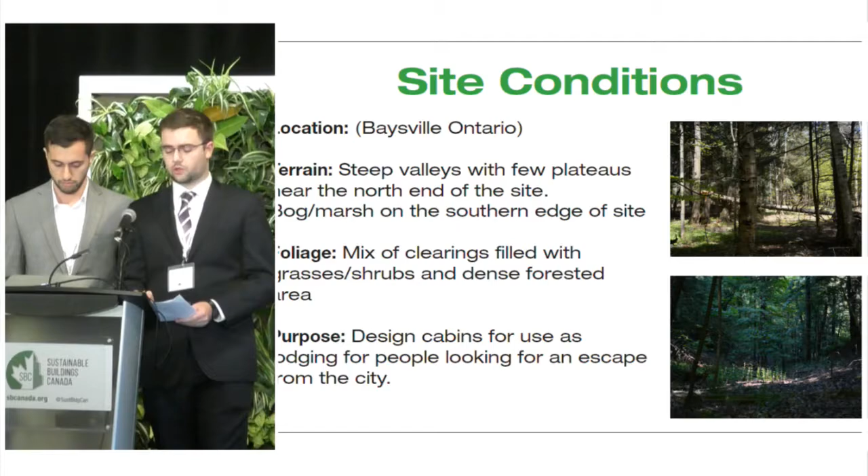So a bit of a description about the project. The location itself is in the Muskoka region, where the site is covered with a mix of shrubs and dense forest. And the purpose of this project is to design cabins to be used as lodging for adventure seekers and people looking to escape from the city. The client requested that we design off-grid cabins which have a minimal impact on site and do not use fossil fuels. The cabins are sized for 2 to 4 people who would stay on the site for up to three days at a time.

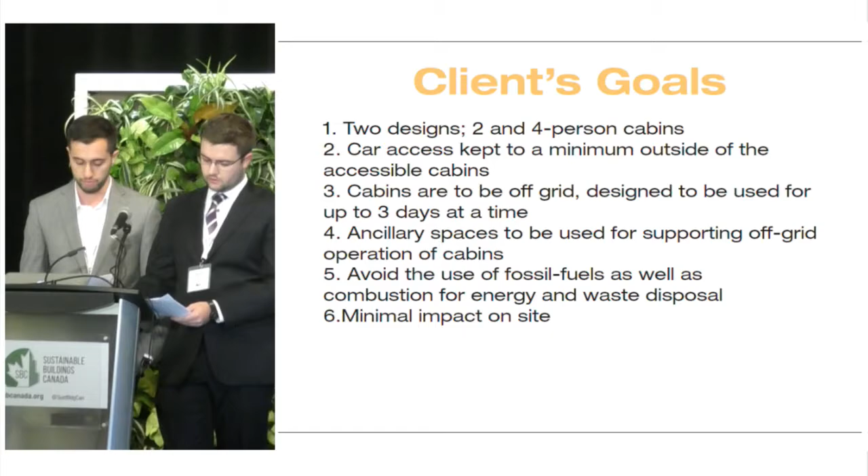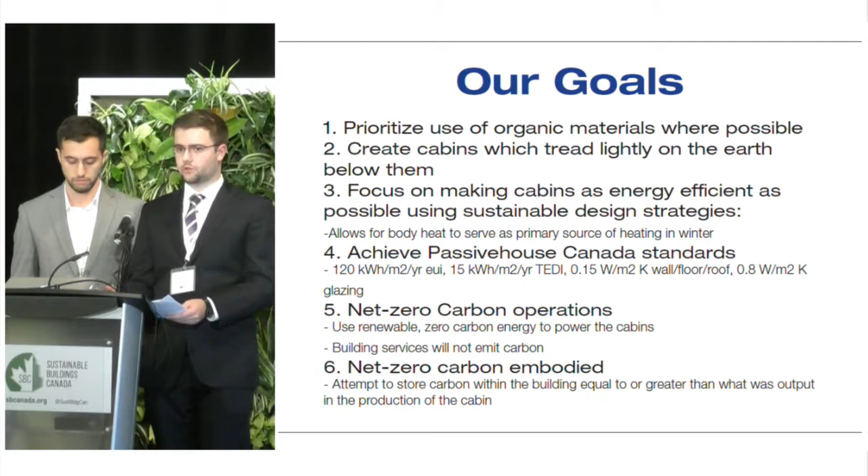So our primary goals for the project were to create energy-efficient cabins which were both light on the site and also focused on the use of natural materials. Other goals include conforming to the Passive House Canada standards, as well as attempting to achieve net zero building operations and embodied carbon. Our idea for the cabins was to create a wooden cradle in which the cabin would sit. The cradle itself would allow the prefabricated cabin to adapt to various site conditions as well as blend in with the surrounding environment.

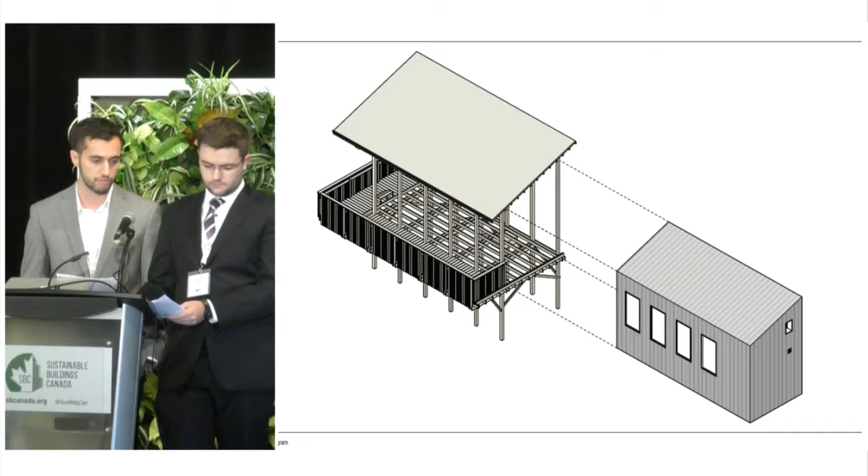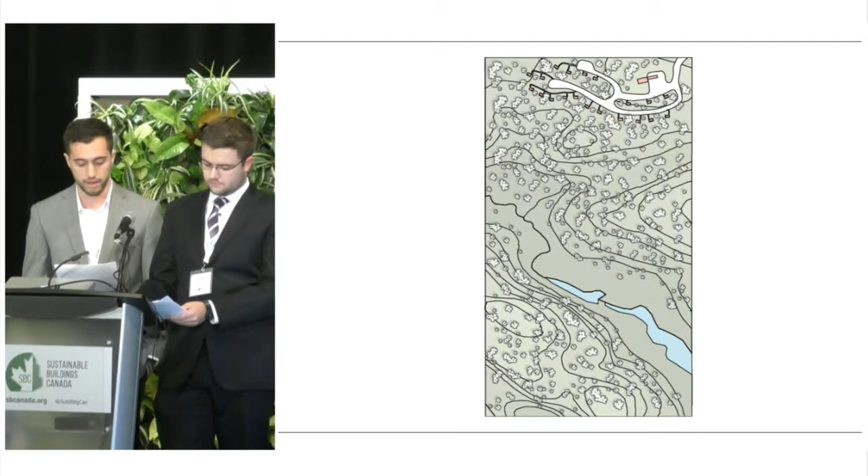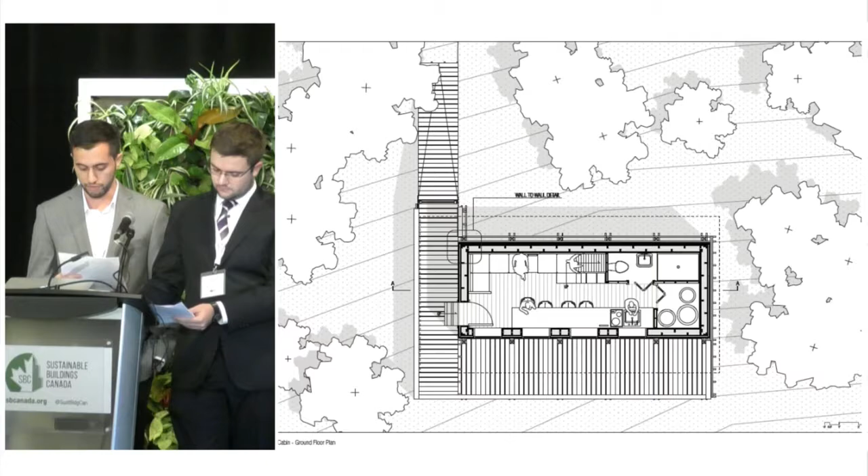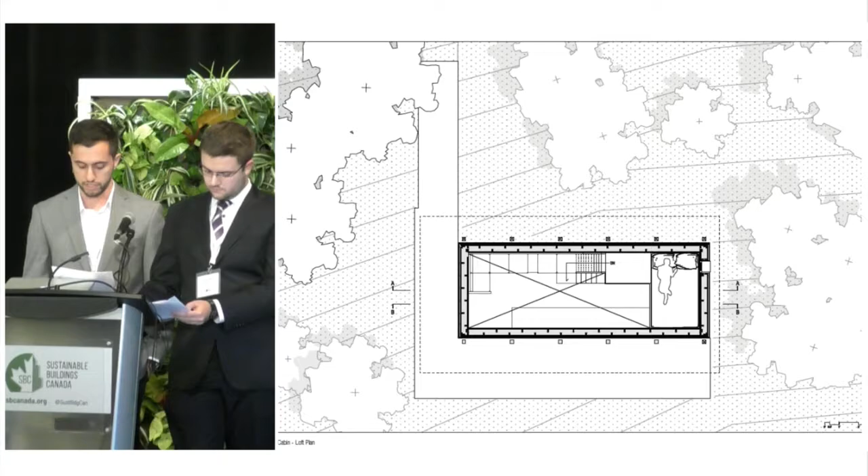After analyzing the site, it was clear that the most ideal location for the cabin was the northeast corner. This had the most flat topography, existing road access, and the largest clearing of trees for parking and solar power generation. For this project, we designed 2 sizes of cabins dependent on the number of occupants. The layout for the 2-person and 4-person cabins are quite similar, with the large south-facing windows, the custom furniture, and a staircase leading to the loft space above. The major difference between the two is that the 4-person cabin has an additional bay to accommodate a larger washroom and seating area. The loft space allows for storage by the stair landing and a small east-facing operable window for passive cooling.

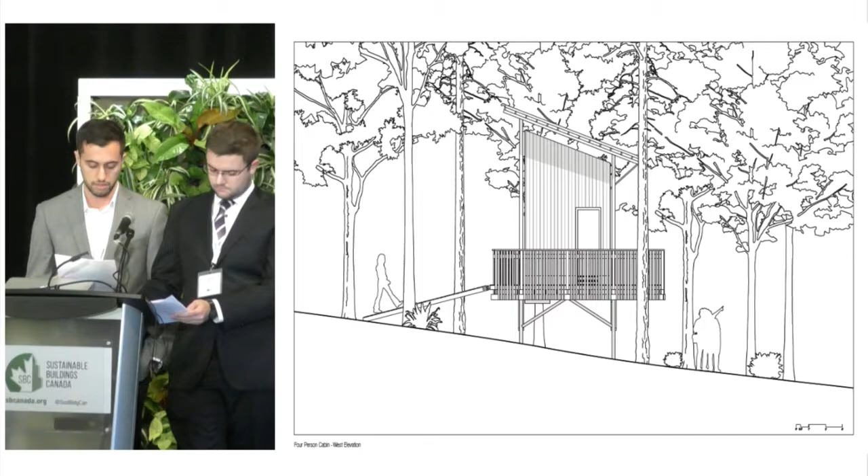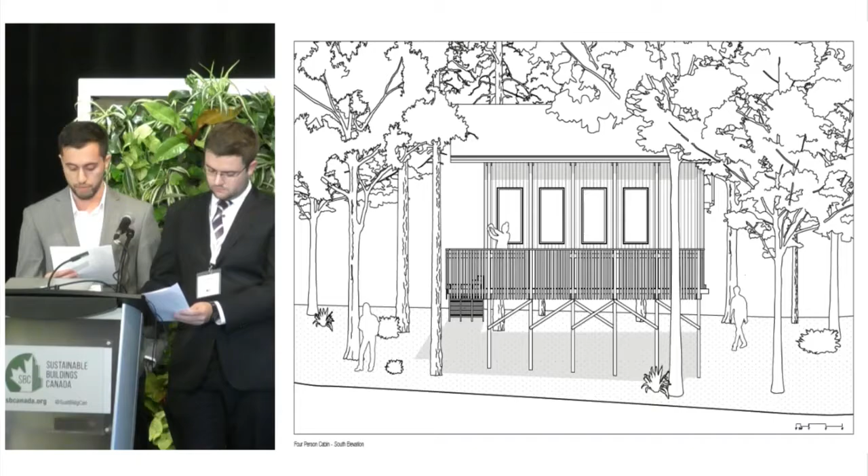The main approach to each cabin is from the north towards the ramp, which then adapts to topography and elevates the occupants amongst the trees. The wraparound porch extends south to provide an outdoor seating area for the occupants, and I feel the south elevation really captures our idea of camouflaging the cabins amongst the forest through the use of vertical orientation of major building elements like the exterior cladding, the railing pickets, and the structural timber columns. The roof also extends out at the optimal length for passive solar shading, as well as maximizing the orientation for the PV panels on its surface.

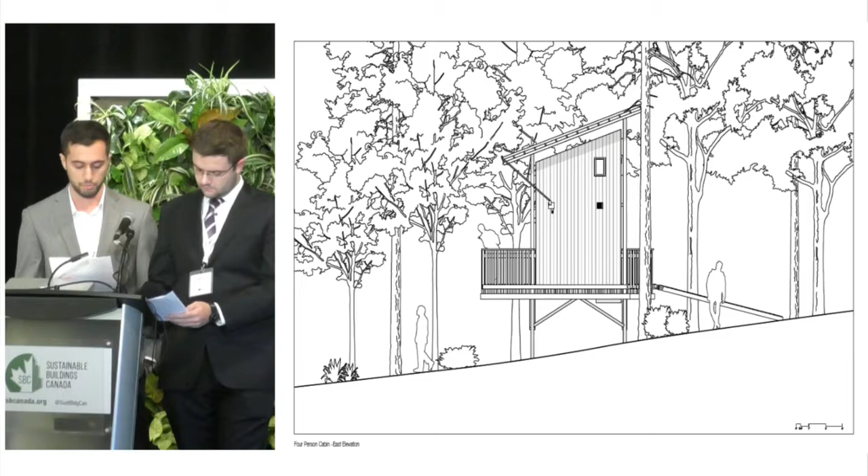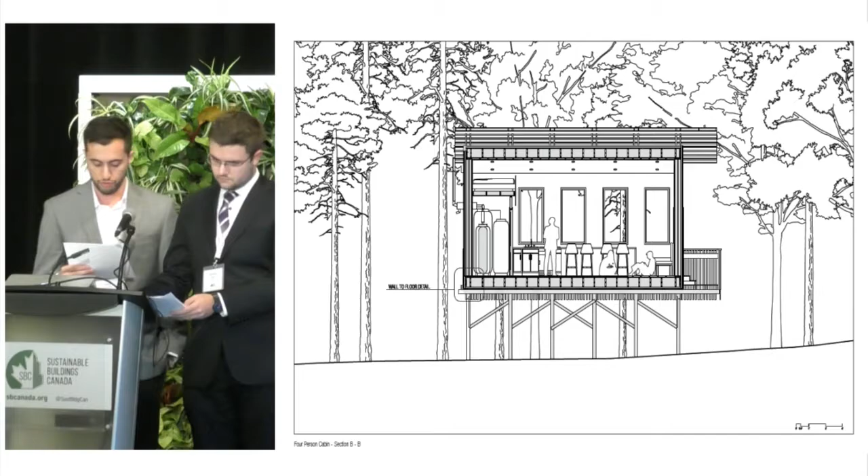To accommodate for the lack of storage in such a small space, the steps themselves become storage units for the kitchen. This allows the beautiful views of the forest to remain unobstructed and further immerse the occupants into the surrounding environment.

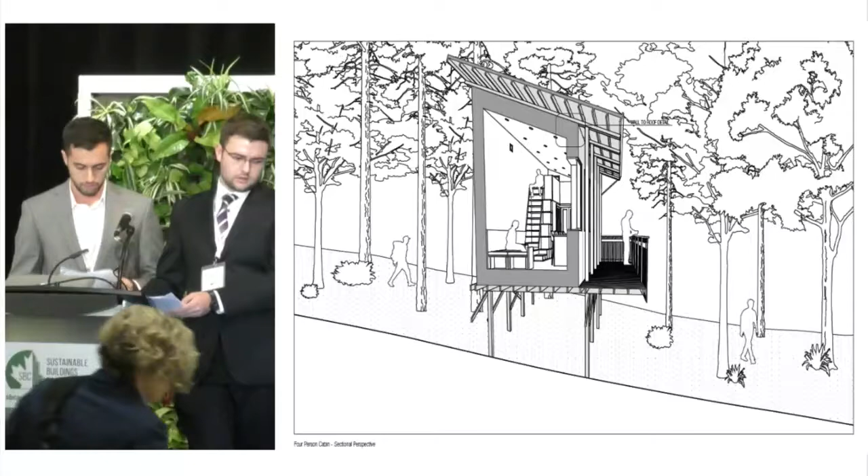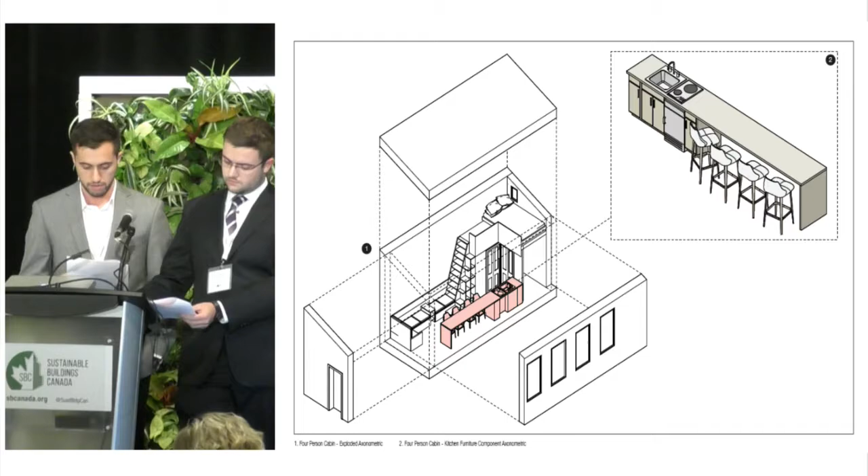For the interiors, we tried to optimize the aspect of prefabrication through the use of custom built-in furniture, such as the kitchen counter and the couch. The counter was designed to mitigate all vertical storage on the south facade and focus on connecting the occupant to their exterior location and environment.

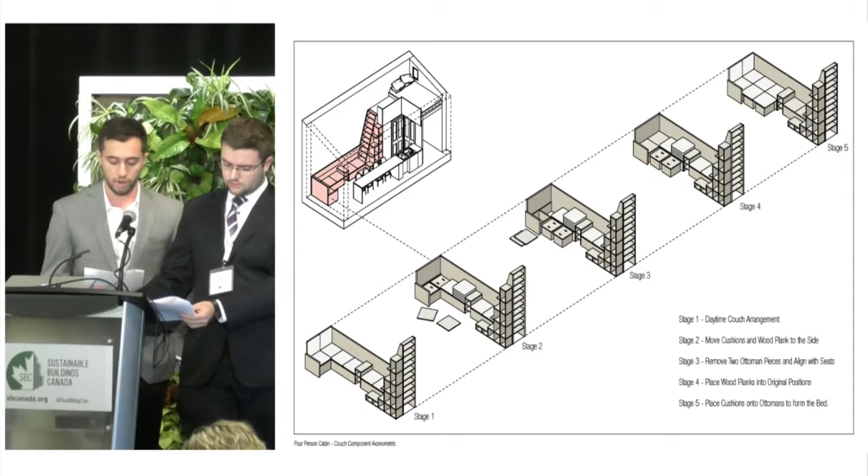This diagram showcases the built-in sofa that can be converted into a bed in order to accommodate 4 occupants. To further optimize the space, the couch and staircase are combined into a single element, thus creating a visual connection between the different levels in the space.

All right. So one of the largest challenges when designing this cabin were the details, and constructability was going to inherently be an issue due to the prefabricated nature of our building. So to address this, we focused heavily on constructability and ensuring that the cabin is both easy to build and airtight. The building's prefabricated components would be delivered in separate panels and assembled on site. Bolt connections located on the interior of the panels would be used to attach these elements while ensuring the highest degree of airtightness.

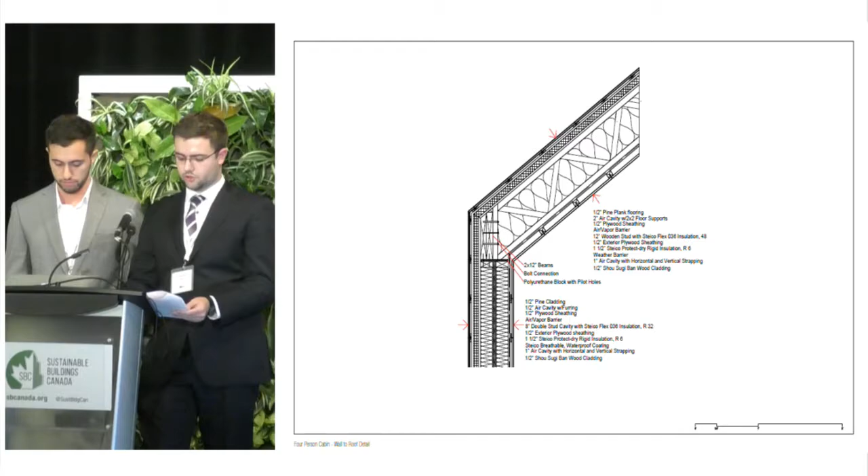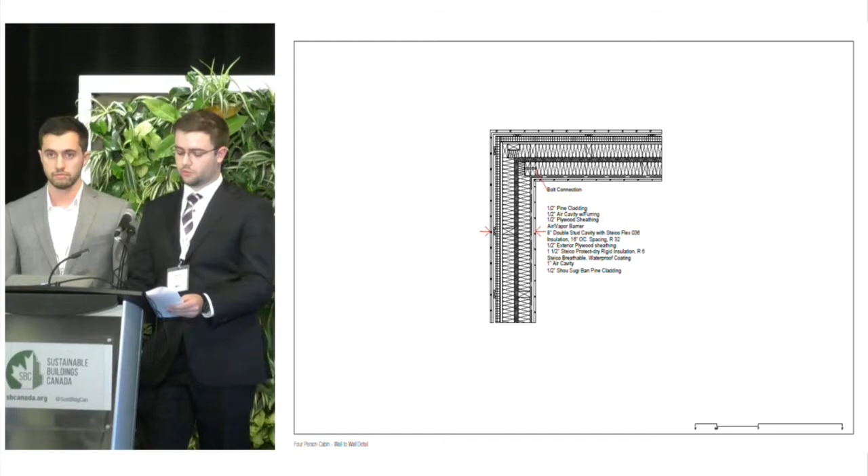So another focus of the design was to reduce thermal bridging to the smallest level possible. To accomplish this, the walls are made of a staggered double stud frame with wood fiber based insulation on both the exterior of the wall as well as the interior wall cavity.

So the floor and the roof structure are comprised of wooden trusses, which allow for higher insulative values than traditional joists. And the floor itself is raised 2 inches off of the top of the plywood, which allows for electrical outlets, wiring, and in the same case for the ceiling, the lighting to run through the building without penetrating the envelope. And another quick detail is the cabin itself sits atop rubber vibration isolation pads, which are generally found in HVAC equipment, which act as another thermal break.

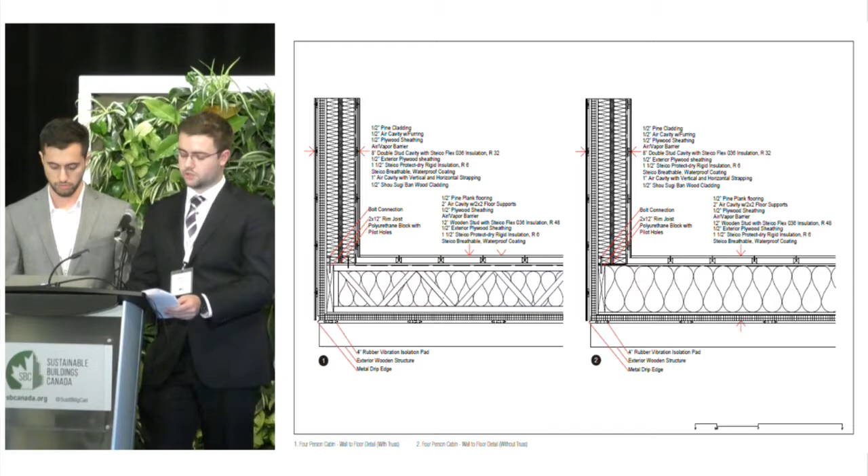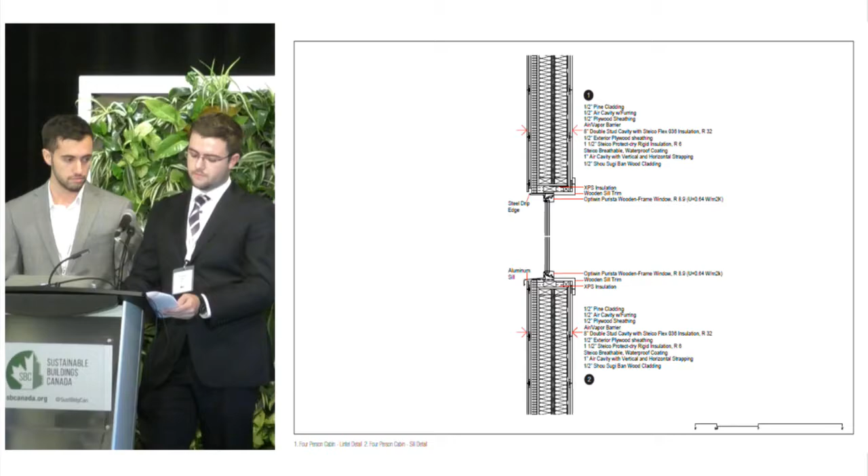As for the glazing, we opted for wood frame triple pane windows, and these windows coincide with our desire to pursue natural materials while also providing a very high insulative value. The mild summers in Muskoka allow for the cabin to be cooled strictly by cross ventilation, thus greatly reducing the cabin's energy demand. And the primary heat source during the winter months is actually the appliances and the occupants themselves.

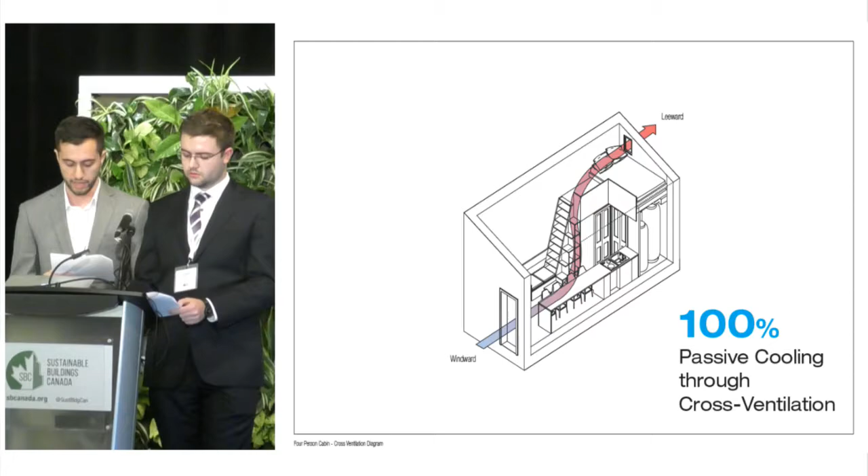The cradle roof creates a large surface from which rainwater can be collected for use in the building. The diagram on the right showcases how the rainwater ties into the overall gray water filtration system. The use of ultra-low flow fixtures and pint flush composting toilets allow for an extremely low projected daily water usage.

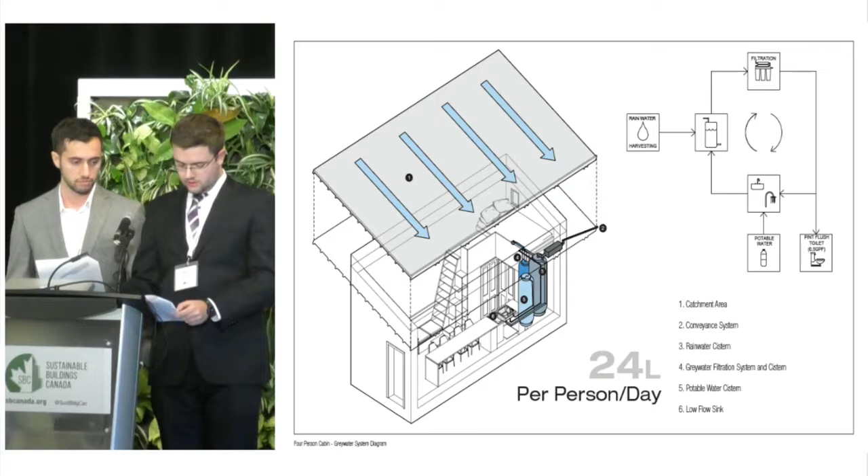All right, so the cradle roof also doubles as a mounting point for a thermally broken 7.8 kilowatt solar panel array. The generated electricity is stored in a 15 kilowatt hour battery located under the built-in sofa, and for this we used a system by an Australian company called Relectrify. Their approach is unique as they take recycled and depleted EV batteries and repurpose them, so they repack them into individual cells to be used as a modular energy storage system.

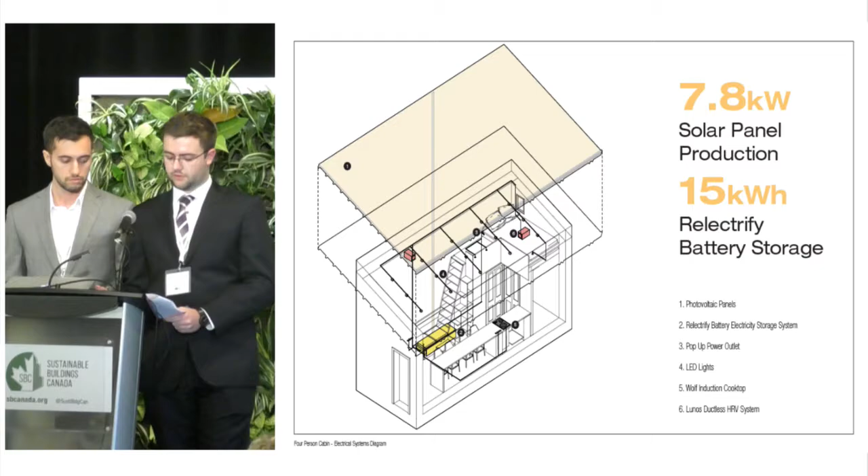Energy Star appliances and LED lighting were used to keep the electricity usage as low as possible, and finally a pair of micro HRVs serve as the supplementary heating and primary ventilation system during the winter months.

So another challenge that we discovered while working on this project was keeping the thermal energy demand and energy use intensity low; keeping it under the passive house standard we found extremely difficult due to the small size of the building. So we were able to achieve our goal of passive house, and the U values were well within our limit.

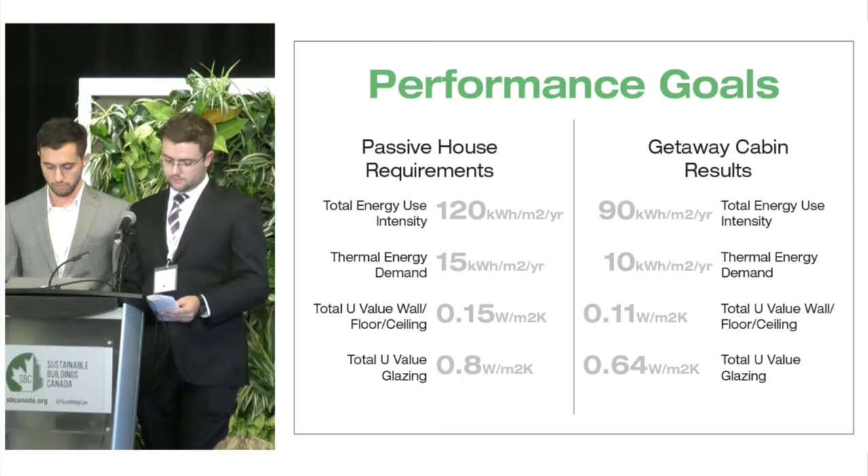And then we were also able to achieve net zero operations as shown earlier, but unfortunately we weren't able to achieve net zero embodied carbon without wastefully using wood for the sake of carbon sequestration. We do, however, believe that the inclusion of our staff and ancillary buildings in these simulations would allow the project to achieve net zero embodied carbon.

Though situated on a rural site, the design of our cabins is quite flexible and can be modified to fit in an urban setting. Due to the better ease of transportation in a city, the units can actually be fully fabricated in a factory, reducing the on-site construction to merely the support structure. So by combining multiple cabins together into a small community, they can effectively run independently from the grid, similar to how the cabin does, and what we designed is more of a platform, not so much a single cabin.

So future applications could be for affordable housing projects, as well as emergency pop-up housing for, let's say, either natural disasters or refugee housing. And it's kind of our take on the future of compact and sustainable housing.

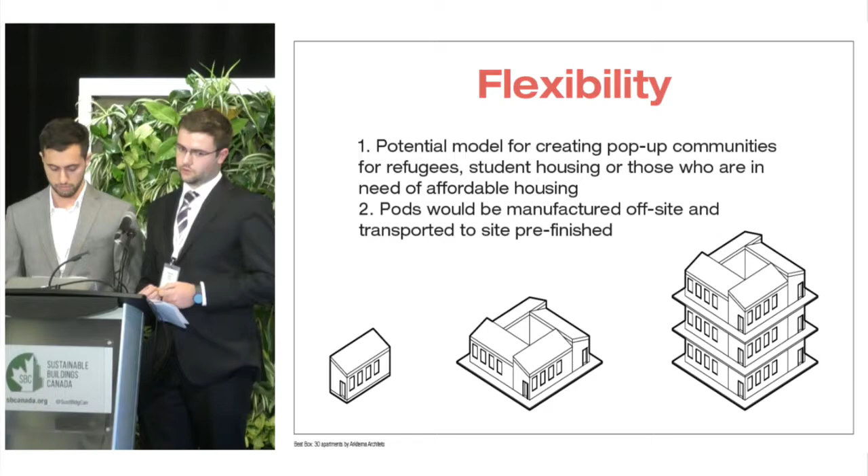Right on time. Thank you.